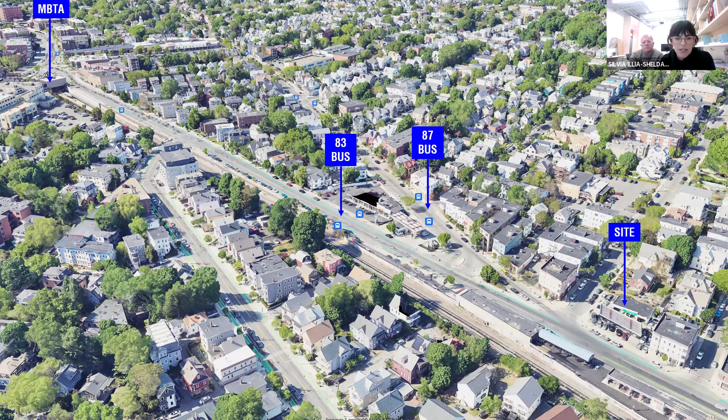A little bit about the site: we are very close to Porter. We have the 83 and 87 bus lines serving the site.

Looking around the site, this is the lot we're abutting, 671 Somerville Ave, which has a prescriptive easement, so we have to accommodate this fire escape. The back of the site is being shown right now. This is abutting 1 Craigie Street, just so we have visuals on that.

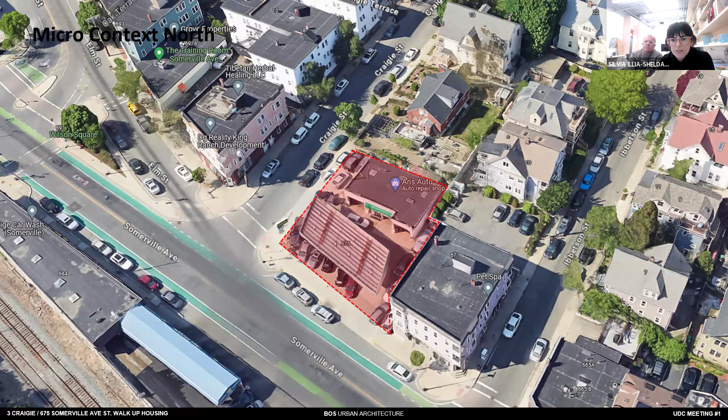Just quickly, this slide shows the immediate context, for scale and materiality of our neighbors. There's a lot of popped color and brick, and the car wash across the street.

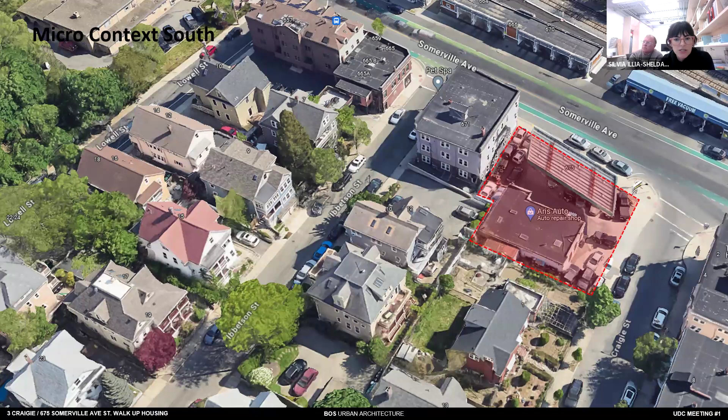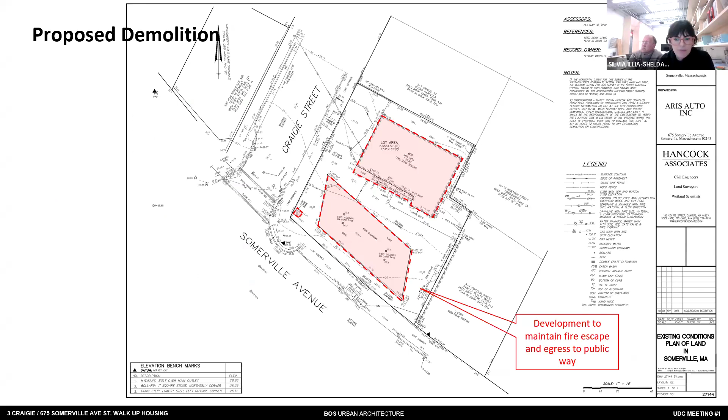Okay, so back to this, the zoning requirements are met. This is a survey that shows the existing structure that we're proposing to demolish, and we are again reiterating that we're keeping that fire escape and egress, maintaining and respecting that.

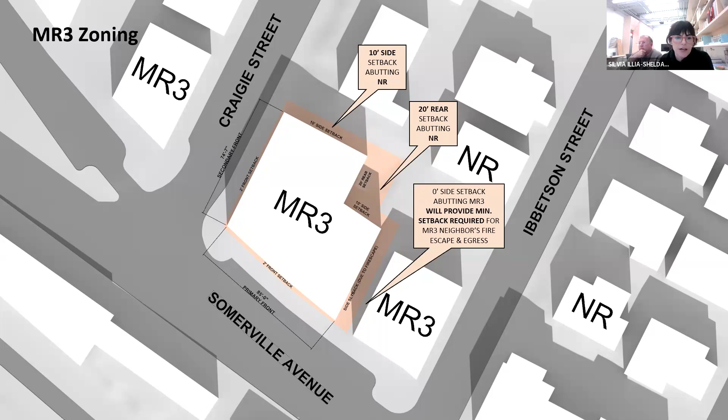Looking at the setback, because it's a corner lot, we have a slightly different setback situation. We have 3 side setbacks and 1 rear. The rear one is 20 feet because it's abutting NR, and then we have a 10-foot side setback abutting NR. Here we have an MR3 abutter, so it's a 0 setback, but again, because of the fire escape, we're keeping that setback there. We are also respecting the 12-foot setback from the curb, which means the front setbacks from the lot line are 2 feet.

So here are sort of the nutritional facts of what we're proposing. We're proposing walk-up housing with a mix of duplexes and flats. There's a commercial space on Somerville Ave. Again, cross ventilation is important to us. No elevator on this, just 2 egress stairs. We have an idea of creating a unit type that's repeatable. Our goals for this development are that it's low maintenance and durable.

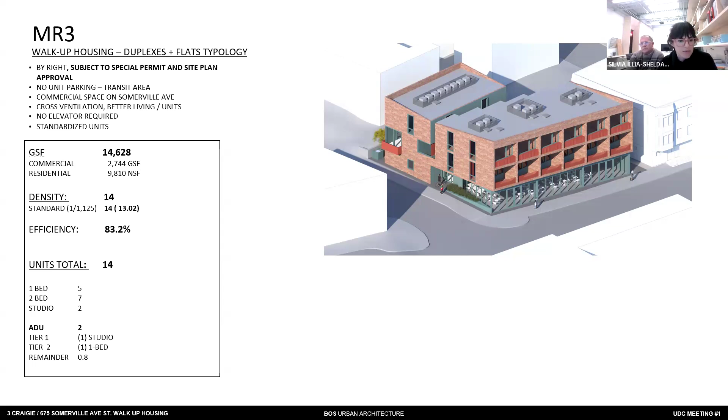So just to go over numbers: we have a GSF of 14,628, with 2,744 gross square feet of commercial and 9,810 net square feet of residential. This yields about 14 units, 83% efficiency. We have 5 one-bedrooms, 7 two-bedrooms, 2 studios, 2 ADUs, and a remainder designated as affordable.

Moving on to these slides, we're just going to quickly go through specific topics to get you acquainted with the planning. We have a massing that is broken down into 2 parts, joined by a common terrace. On the ground, we have 2 main access points: a residential access on Craigie and a service access on Somerville Ave, also used for trash, fire, and egress.

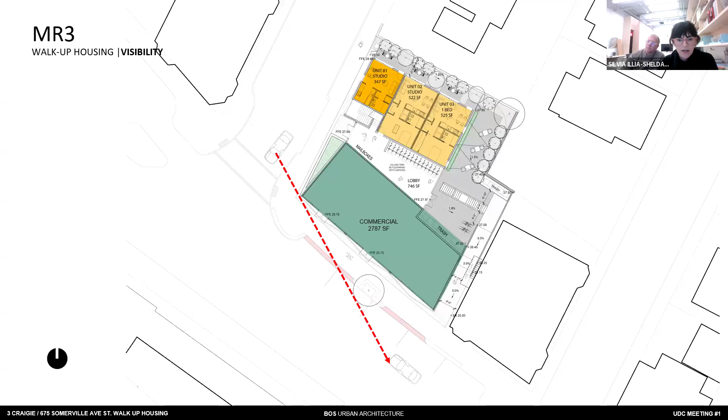In terms of bicycle parking, we're proposing 14 long-term bicycle parking spots indoors and 4 short-term bicycle parking spots outside under a covered canopy in the back.

For open common space, surrounding the entire development there are open outdoor amenities, and there are 3 dedicated private outdoor amenities for the units on the ground floor, which are fenced. You go up the 2 stairs and you end up in this terrace, and this terrace is the one that distributes you to all your front doors.

Everyone has their own front door. Like I said, these are duplexes and flats. The flats are in a strong orange color and they're stacked. So from here, you go to your duplexes or your flats.

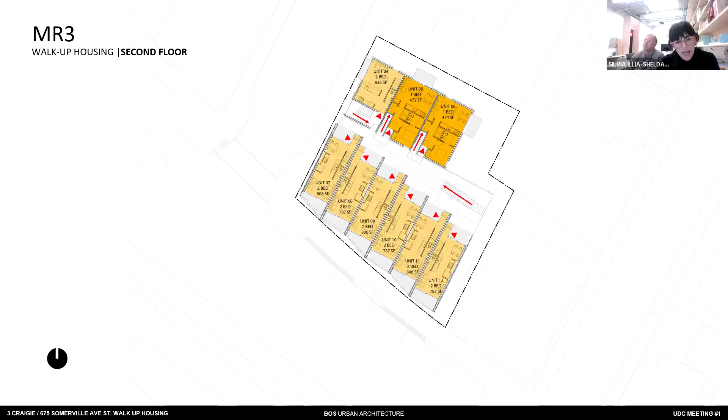And if you notice here, adjacent to the door to the flats, you go up to the 3rd level, continuing with the duplex and then onto the last 2 flats.

Moving forward with the facade, there's 1 massing and 3 facade options. We've basically articulated 3 ideas, from a very simple flat one to a more articulated pleated one. We're using brick for all 3, but with different color palettes.

The brick does 3 really important things for us. Brick is a non-directional material that reinforces our massing. It gives a cohesive reading to the whole building. It's also obviously durable and has low maintenance.

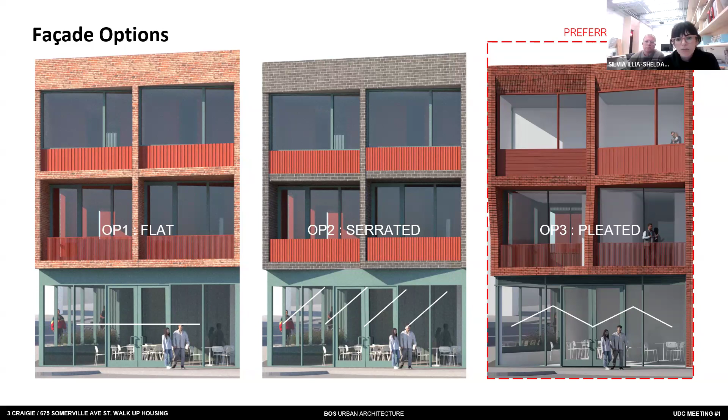On the right, we have our preferred option, which is the pleated one. Here's a corner view that shows the building, and shows that brick is again unifying the massing, but we have two different readings, one on the primary front and one on the secondary front.

We have the opportunity to use color for accents and to signal a difference between the exterior and interior facades. We want that commercial space to have a strong presence on the corner, and it also wraps through at Craigie Street, setting up the residential entry.

We're going to see now the version with the gray brick color and the version that is pleated. The primary material in option 1 is face brick, a rose blend. The secondary and accent materials are fiber cement boards in 2 colors, with and without a linear pattern. The storefront color and the window frames will match.

And this color is very dear to us, it's the Petrola green. It has a history on the side. We want to limit the color palette to 3 materials, so the brick becomes a unifier and the color becomes a disruptor, or the activator in a way.

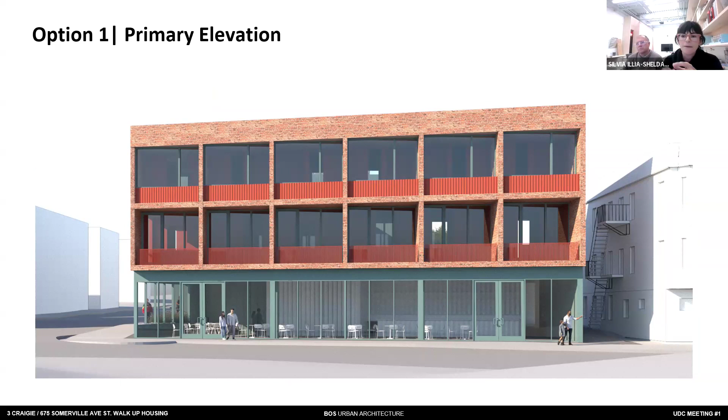There will be railing and low wall accents to show texture and break up the brick a little bit. There's a subtle change here in the shadow line with the serrated balconies. It's doing a little bit of what the Cambria Hotel is doing, right? It's sort of a serrated angle.

In the preferred option, we're playing with the detail of the brick a little bit more, and the movement of the ins and outs of the bay continues more strongly now to the ground, so that line continues and addresses the 28-foot bay. We think this one has the most potential.

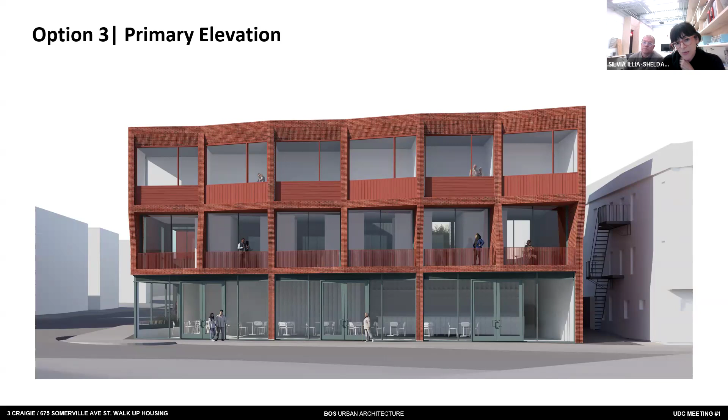Other views looking towards Porter, just to see the changes. Now let's shift a little bit to the residential entry. Here the grid is shifting, which creates naturally a recessed entry on Craigie. The residential scale is accentuated also by the grade change going up.

So we're playing with switching to a texture panel at the entry. If you see it on the right here, there's some vertical pattern in the same color, but it changes the texture.

So flipping through option 2 with the grays, a little bit more contrast, you can now see a little bit better the serrated balconies. And option 3, I prefer.

This option has a slightly different treatment on the gap between the two parts of the building, where we can put signage. There's also a planter/bench that starts as a curve and grows into a bench as you approach Somerville Ave. We thought that would be a great way to integrate a little social space outside of the residential entry.

So this is the Craigie Street view descending towards Somerville Ave. Again, we're using the parapet lines to make the form a little more dynamic, to break the massing. We enjoy the color playfulness with the balconies against the brick.

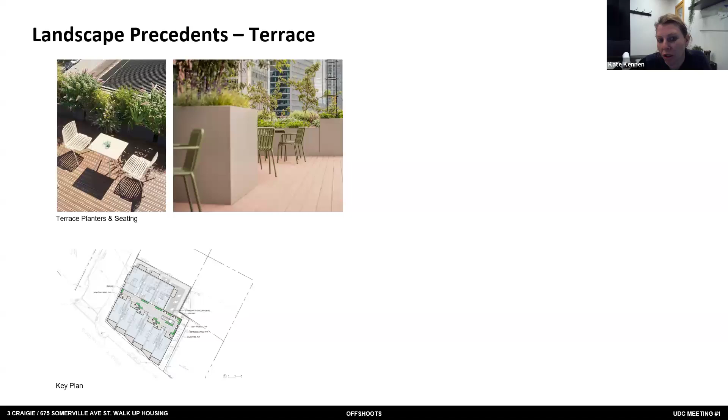For the planting strategy, we always look at the winter and summer prevailing winds, because we think about the automobile uses off Somerville Ave and bus and train traffic, and where the particulate matter is coming from, and also where the groundwater flow is coming from in the upper right-hand corner. Then sun is obviously coming from the east along the south to the other side.

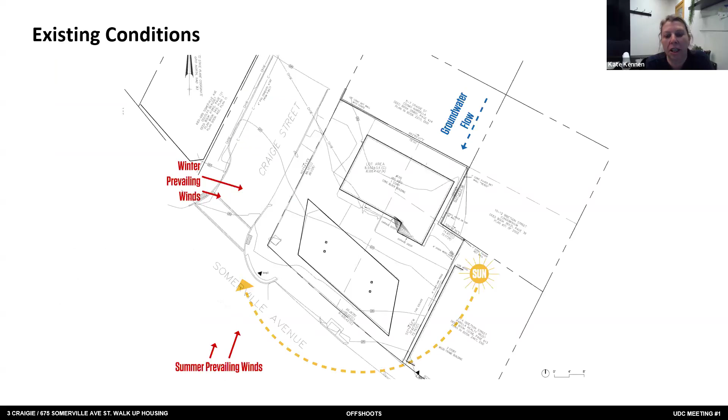So when thinking about that with our planting strategy, the next slide shows how we've been considering it. Offshoots has been doing a lot of work on the Somerville Pollinator Action Plan, so we wanted to create a pollinator-informed design as part of this project, especially with it being an environmental justice neighborhood.

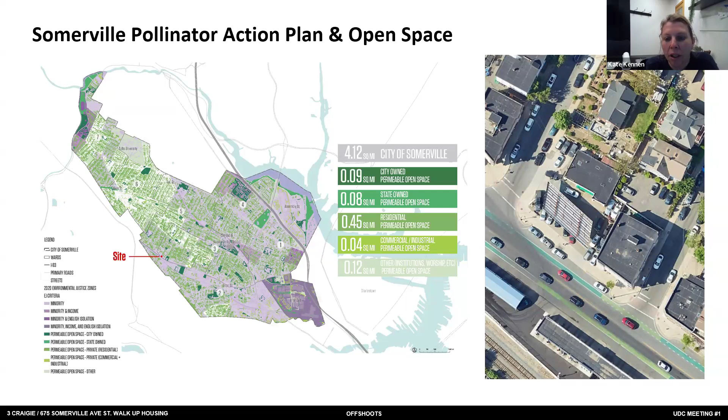Next slide - we have trees along the back, and the unit terraces having a phytoremediation typology, so plants that can actually clean up groundwater contamination. Not that we expect any, but if there was any residual petroleum, we're creating a phyto buffer on the back side.

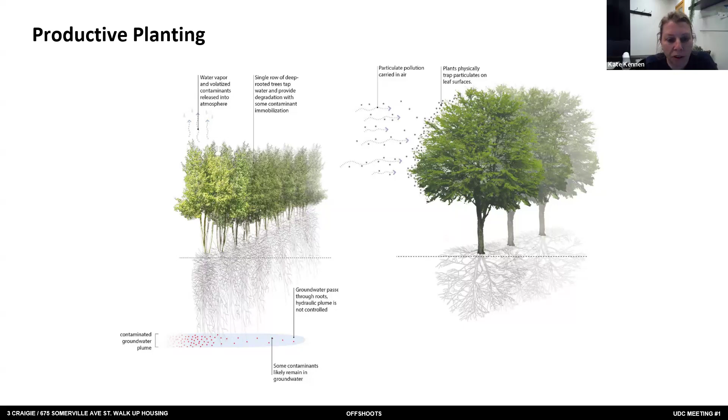And then our one street tree in the front is targeted for air particulate matter removal with stickier, waxier leaves of the American sycamore. And then here, these are just the actual plantings.

Planting proposed: in the back, again, a few big shade trees with a basswood and a couple of quaking aspens, and then some hybrid poplar, which we would coppice and actually cut down every handful of years as they start to fill in that site.

And then there's also a back site wall that would stay as well, that we're talking about adding Virginia creeper to the existing wall to create sort of a green screen on the back with a native plant.

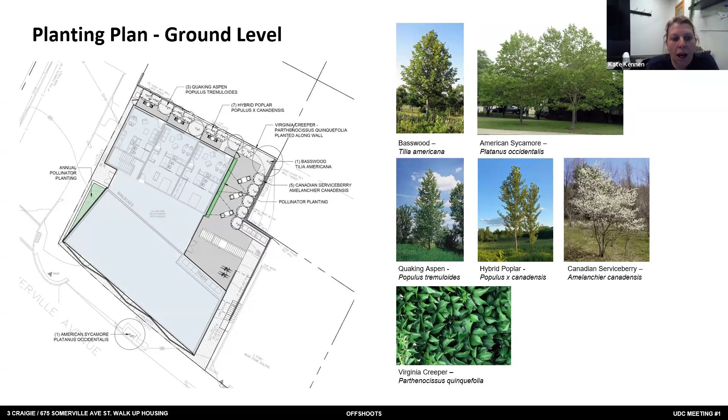And on the next slide is the pollinator planting. So straight from the Pollinator Action Plan, we took the magenta magnet concept, thinking about this for the green planters on the site that'll receive a good amount of sun on the ground floor, doing seasonal annuals and pollinator-forward planting design in the front underneath the overhang that would be replanted each year.

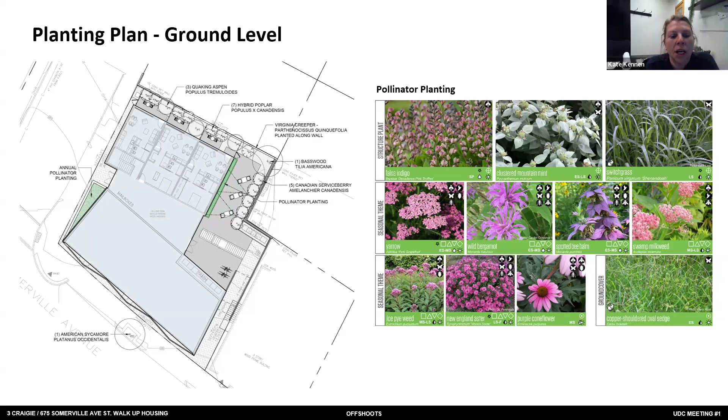And then the next slide is lastly the planters at the terrace, again right out of the Somerville Pollinator Action Plan, taking the shady pollinator plantings and putting those in the containers to have a place for them as part of the corridor.

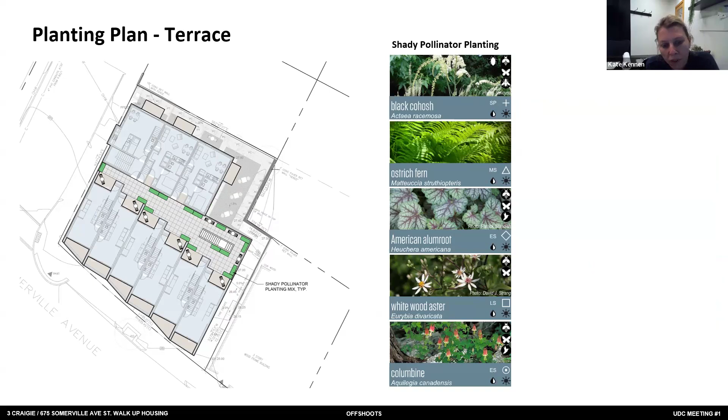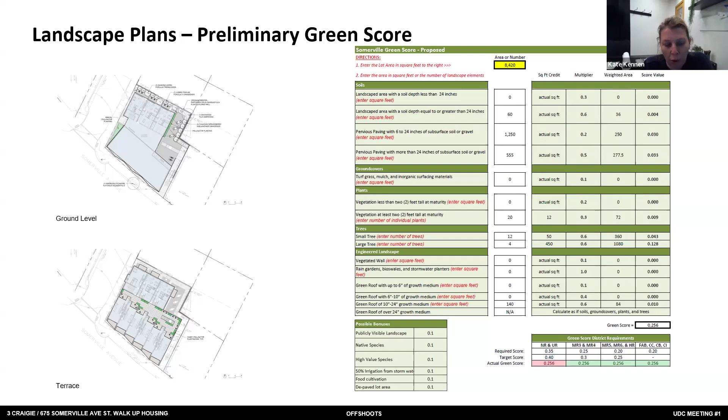And then lastly, the green score. So for this particular design, even with the green roof, we've achieved the green score with some pervious pavements and other things as well. I could walk through this more specifically if people have questions, but we're able to achieve that with the amount of green space shown here.

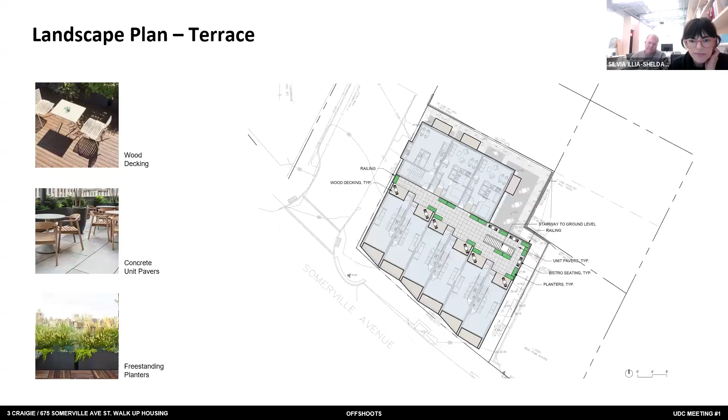I had one, you guys probably covered this, but is there an accessible entry or accessible way to that second floor? No. All 3 ADA units on the ground floor is what's required. Because it's not an elevator building, we're not required to bring ADA access to the second floor. So the ground floor units are accessible, but anyone who wants to go above is not accessible. That's right.

Any other clarifying questions from the committee? Yeah, one question just about the transformer and its location. I think there might be two different ways that this is represented.

Here it looks like the transformer itself is proud of the face of the building, in the space of the sidewalk. And I think some of the renderings showed it perhaps within an enclosure that is set back from the face of the building. I think it's shown 10 feet from the curb line, which was the Eversource standard. It may need to be 12, so I guess to clarify that question - I'm not sure if I put it in the right spot, to be honest with you, Tim.

Okay, it should be 10 or 12. 10 is the minimum from Eversource. We put it as close to the street as what Eversource wanted, but 12 is the actual setback from the curb. So I didn't know if this was a building element or if it has to be 10 from Eversource - it could be either one, but we showed it at 10, which is why you see it slightly closer.

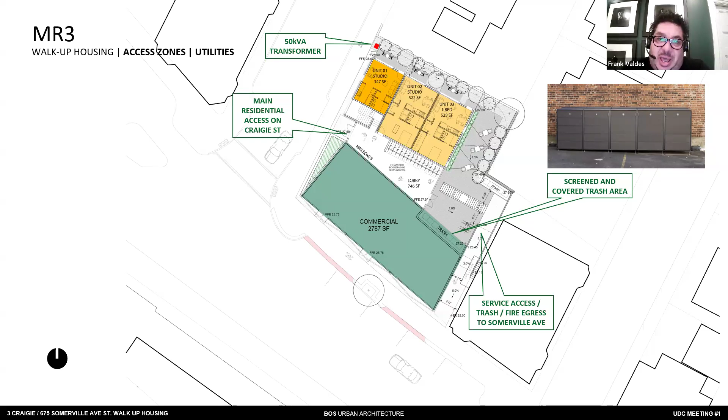Considering the fact that your commercial space isn't going to be using gas, it could potentially be a restaurant, and that could require more electricity, which could trigger it up a little bit more. We've seen it happen as well, so just be mindful of those ups. Appreciate that. Thanks, Frank.

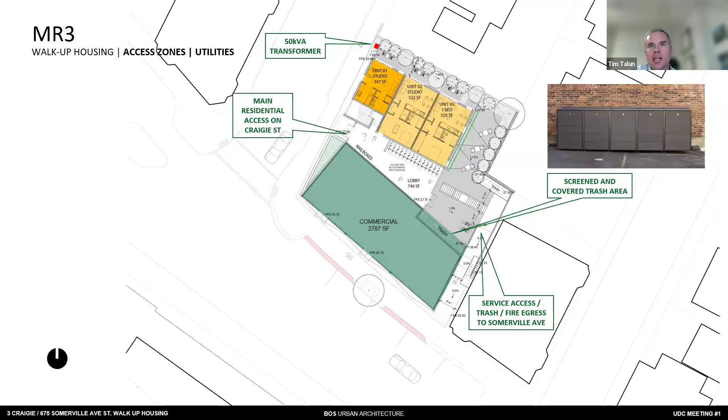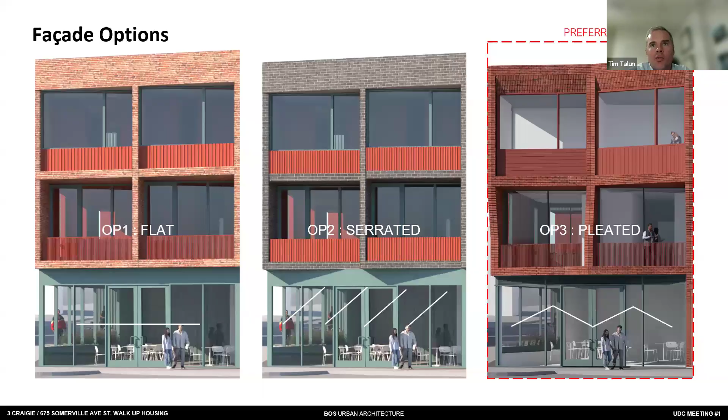I had another question, kind of getting into the weeds a little. I think you've included a lot here, which is great, and there are some interesting things to talk about related to the design. I'm wondering if you could talk about two details: one, how you see the brick turning the corner at these balconies. It looks like in all the options you have the brick returning into the depth of the balcony, which is very nice, but these are very thin piers.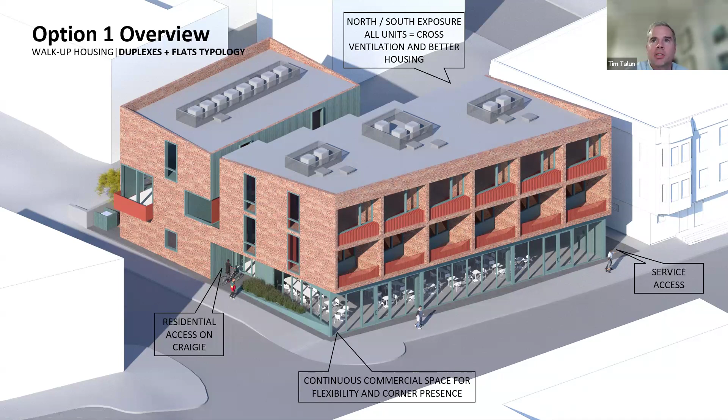Tim, I have a hard time hearing you, can you speak up a little bit? Sorry. I'm wondering if you can talk about how we're seeing the brick returning from the piers into the depth of the balcony, but these are very thin piers. It looks like they're just two bricks wide. Can you talk about that detail a little?

How would that be accomplished? Are these full depth bricks, or are they thin bricks? They're face brick right now, and the walls are 14 inches total, so we could achieve basically 2 face brick with some structure in between in that distance. Now, I don't think this will be a cavity wall for that particular location and detail - I think it would just be face brick without cavity, because we don't have insulation or the need for cavity in that particular location. But we could achieve it in 14 inches, which is what this image is showing.

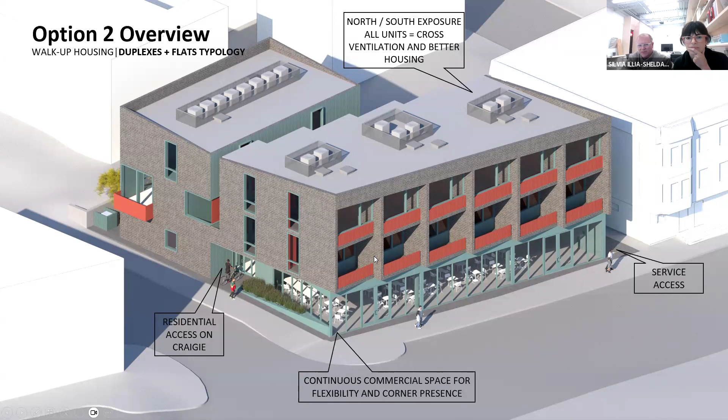This one is a little bit thicker than this one, to be fair. These two are at different levels of development in terms of the visual thinness you're perceiving - that is correct, it's too thin. This one, the preferred one, is visually thicker, a little bit more further along. I could go to a closer image.

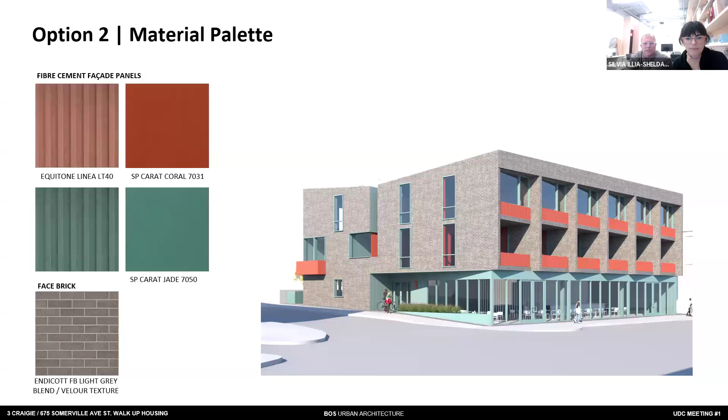Could you stay there for a second, actually, because I have a question on this. Oh, sorry, I'm going back. Oh my gosh, sorry, it's like delayed.

It's all right. Is it wood construction? Can you tell me about it? Right now, it's wood construction, that's the anticipation. It may be metal studs and it may be wood, but it's light wood, light frame construction.

So the only thing I was looking at and wondering, when being wood construction - I appreciate the design and the detailing you have done, so I want to make sure that the intent you are designing to comes across in the end, making sure those two things marry. So when I look at that window where the arrow is, looking at the balconies and that window, I have to assume that window goes to the floor, and the thickness of the brick below that is really the construction of that floor component. Am I correct in that assumption?

That's correct. There's also a little bit of an error on this image - if you can see the floor through the window here, something slipped slightly, so it'd be a little bit thicker. You can see the white behind this window.

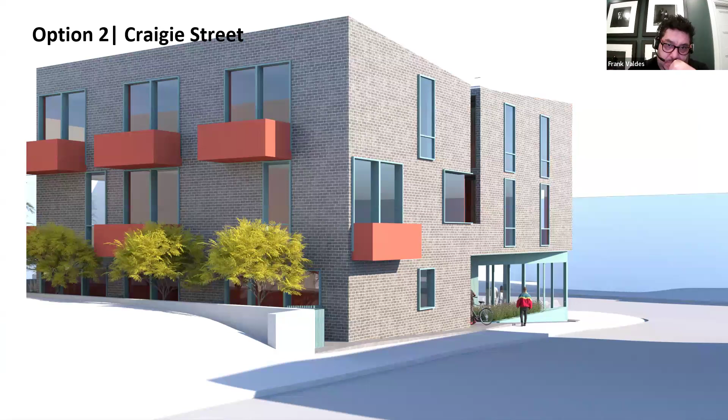Great. And are there any comments or preferences by the committee on the flat facade versus the corbelled option that we're seeing here?

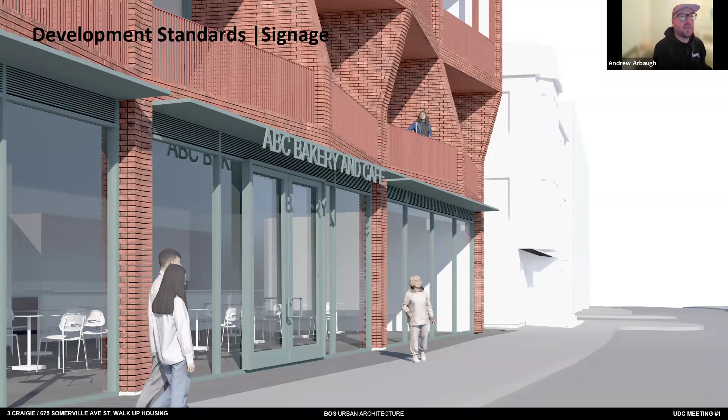I'll jump in and do the landscape before we move to that, if that's okay. So thank you - we see a lot of just sort of parsley around the pig, an unusable landscape space that is there exclusively to hit the green score. And this is not that. This is actually meaningful open space that can be used by people who live in this building. The plant palette is lovely - no comments on that, no surprise on that either. So I definitely commend everything that's going on with the landscape here.

I had the same question about the transformer. It would be nice to understand just what that relationship is, including offsets. It looks very, very close to the terrace where it is. So I think other folks have already noted that as well.

And then just to note, I don't love that so much of this building is not accessible to people with disabilities. I understand that that's within the code. It doesn't feel like it's in the spirit of the inclusive community that we hope to be in and live in. But other than that, good job.

Yeah, thanks Andrew, and I do appreciate the comment, and I share your sentiment on accessibility. There's different types of accessibility - walk-up MR3s are uniquely positioned to be walk-up housing, which is then uniquely positioned to be more affordable because you don't have to buy elevators for a smaller unit count. We're actually exceeding the percentage even required by Massachusetts accessibility by 3 - we're actually only really required to have 5%. So there are pluses and minuses, but I do think the cost equation should also be considered, where we could do a walk-up typology that could become more affordable, hopefully in the end for residents in Somerville.

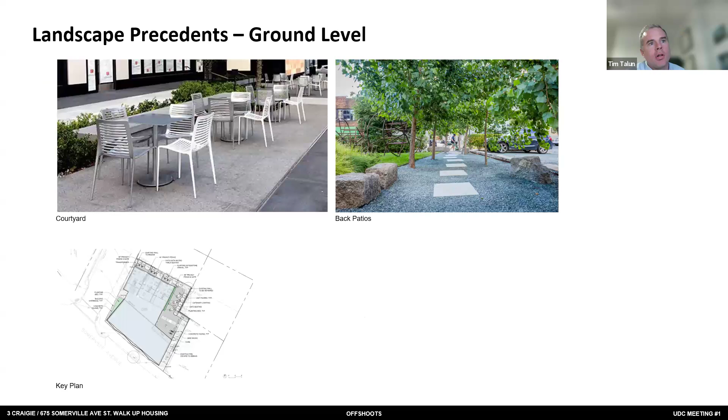Maybe just one, as long as you're on that plan, the ground level. So the service access from Somerville Avenue, which has the fire escape coming down - is there a gate or something that separates the occupant area from that service alley, or is it all just open? There isn't right now. Right now it's all just open.

We struggled with this idea of a gate with the access of the neighbor, which is kind of an unofficial easement as of right now. But we also kind of struggle with the idea of people being able to meander back there too. It'll be something we need to think hard about, whether we need to control access or not.

Is there a concern on - it's not so much a concern, but my only worry would be if it looks too inviting, people will go back there and end up in a space that's really a private space. So how do you, if it's not a gate, signal that it really is a private space, not a cut through?

I think part of the thing is there's the overhang and you're going into the overhang space, and then behind that is more the landscape open space. So there is this threshold that you move through in the back. But we'll think about that a little bit more.

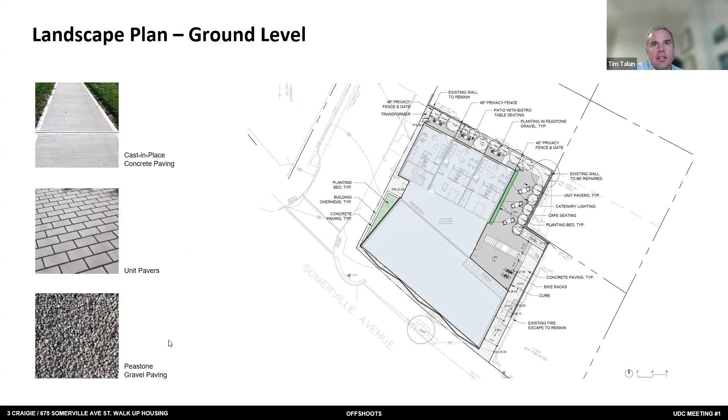I really like the main entrance to the building, the way you've set it in from the sidewalk and the creative way of dealing with that difference in grade, the idea of that being both a planter and a little stoop that people can sit on. I wonder about the materiality of it. It looks like you're carrying that same fiber cement panel onto the face of the planter and down to the ground all around that entry. Are you confident that's going to have the durability to withstand getting kicked if it's the face of a bench?

I don't know if it becomes maybe a colored concrete. Maybe it could do the same intent versus a concrete panel. Maybe that's a way of solving it. Although the saturation is not the same, it may still read the same. But that's something we need to figure out when we get into the details. I think we'd like to maintain this intent, but how do we do it? We've got to do a little bit of thinking on exactly how to achieve it.

I think that makes sense. And I think as you get into detailing the building and start to look at how the building is meeting the ground all the way around its perimeter, maybe the introduction of another material that's specific to how the building meets the ground helps resolve some of those conditions, but still keeps the simplicity of your overall palette above grade.

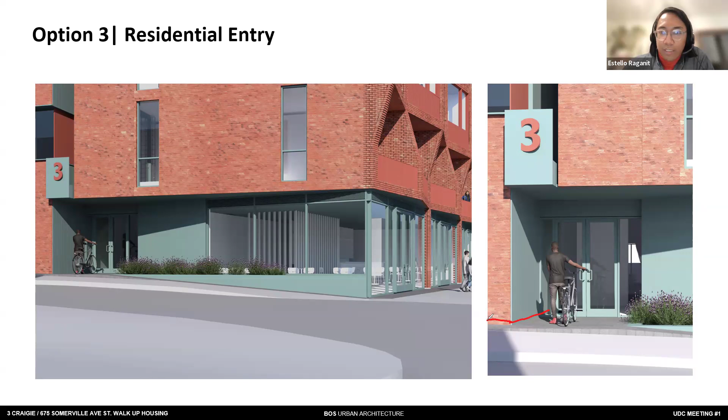Would anyone from the committee like to make a motion? This one would be that it meets design guidelines, and then we'd do another motion to approve each of the criteria as a condition. I'll make a motion that the design guidelines have been satisfied. Is there a second? Seconded. So the motion on the table is that the design guidelines are satisfied by the design shown before us, and we will now move to a roll call vote.

Andrew Arba, yes. Tim Talon, yes. Frank Valdez, yes. This motion is approved.

The next motion would be that we approve the conditions per our discussion, to include transformer location, gate, materiality of the building, structure and flooring and thickness of the balcony, as well as the material and how it meets the ground. Do I hear a motion? So motioned. And a second? Second from Frank Valdez. I'll move to a vote for the additional design conditions. Andrew Arba, yes. Tim Talon, yes. Frank Valdez, yes. Motion approved.

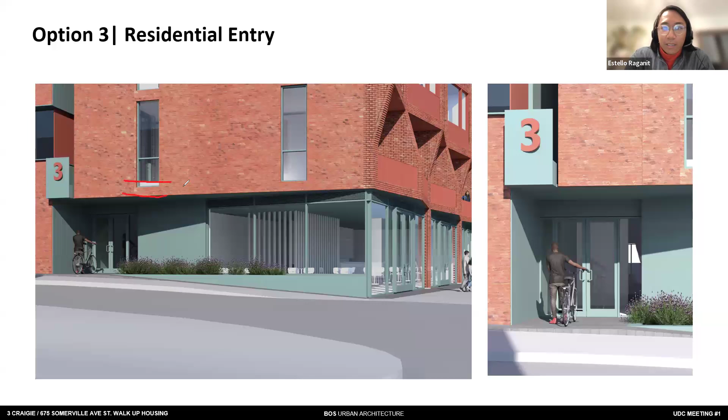Thank you, can you just repeat those? You said them really quickly, I want to make sure. Oh, sorry about that. So the motion just approved was that prior to going to the planning board, the design conditions including the transformer location, the addition of a gate, materiality, structure and flooring—including the thickness of the balcony we're seeing on screen—and the way the material hits the ground, would be resolved. I got all those.